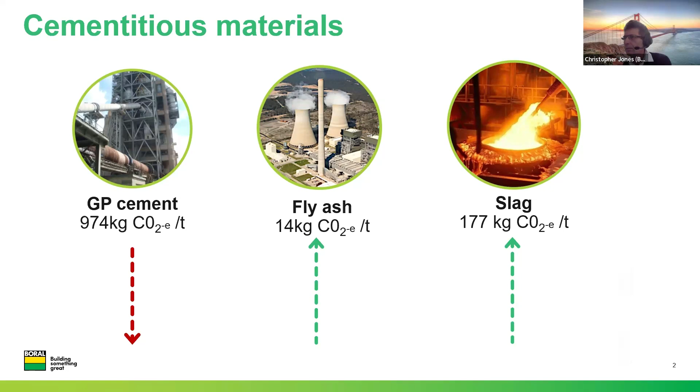Firstly, we need to understand how these values are determined. One of the reasons why slag is higher in embodied carbon than fly ash is that it does require some processing. It has to be granulated and then milled into a powder. But it also gains some embodied carbon through the process of economic allocation.

Economic allocation is a way of determining the embodied carbon of co-products. Co-products are two or more products that are produced from the same process. We don't want to allocate all the emissions to both products, so we allocate the emissions based on the value of each product. Fly ash is considered a waste product with no value to the producer.

Power stations do sell the ash to cement suppliers, but the money they make is so low that it is deemed negligible. So the embodied carbon of fly ash at the power station is zero, and only the emissions from the transport to the plant are attributed to the fly ash.

Slag, however, is different. The steel manufacturers do make some money out of slag, and therefore some of the emissions from the production of the iron are attributed to the slag. This has the result of increasing the reported embodied carbon of the slag and lowering the reported embodied carbon of the steel. So we need to take this into account when comparing fly ash and slag.

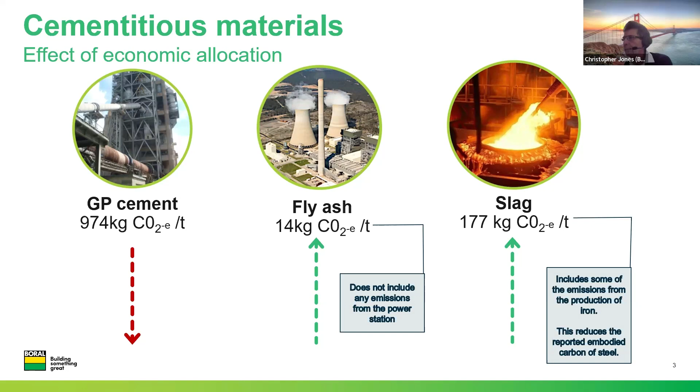The other thing we need to consider is the reduction in GP cement which results from using these products. Let's look at this mix, which contains 300 kilograms of GP cement per cubic meter. We can use fly ash to reduce the cement content, but fly ash is not as potent as GP cement. So for every 1 kilogram of GP we take out, we have to add 2 kilograms of fly ash.

So in this fly ash mix, we reduced the GP content by 50 kilograms and replaced it with 100 kilograms of fly ash. This has resulted in a mix with 29% fly ash, but the GP has only been reduced by 17%. I still see specifications that specify low carbon concrete by a percent of SCM, e.g. 30% SCM. But as you can see, this will not result in a 30% reduction in GP cement when using fly ash.

When using slag, however, you can replace the cement on a one-for-one basis. So a 30% slag mix is likely to reduce the GP content by 30%. And we can replace much more of the cement with slag than we can with fly ash. The example on the right is a 50% slag mix, which has reduced the GP content by 50%. So the point of these last two slides is to show that to significantly reduce the GP content and the embodied carbon, slag is a much better SCM than fly ash.

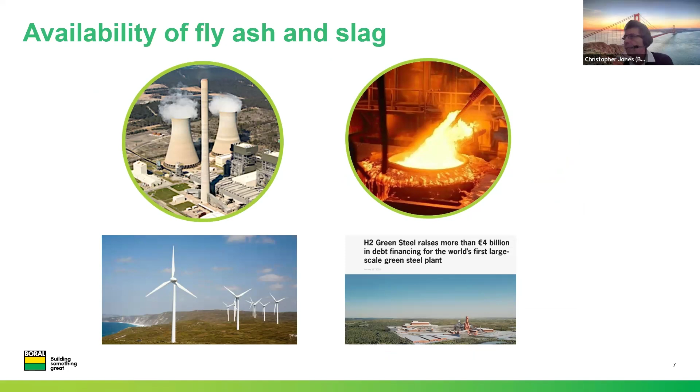So let's look at the availability of these two SCMs and the effect that renewable energy will have on the supply of fly ash and the use of electric arc furnaces will have on the availability of slag. Firstly, let's look at the current availability of slag. I thought this extract from the Institution of Structural Engineers webpage in the UK gave a good insight into this issue. It states that GGBS is an excellent SCM that helps displace clinker demand, which I think we already knew.

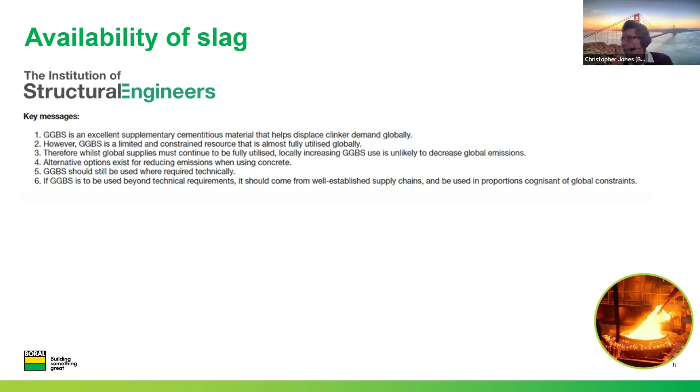But then it goes on to say that it is a limited and constrained resource that is almost fully utilized globally. And the key point is the one that I've highlighted: locally increasing GGBS use is unlikely to decrease global emissions. The production of slag will not increase simply because there is an increase in demand. An increase in demand for a fixed supply will only increase the price of the slag so that the demand and supply are balanced.

And to make it worse, due to economic allocation that I mentioned earlier, a greater amount of emissions from the production of the iron will be attributed to the slag. This will reduce the reported embodied carbon of the steel, but if you're only interested in low carbon concrete, that doesn't help much.

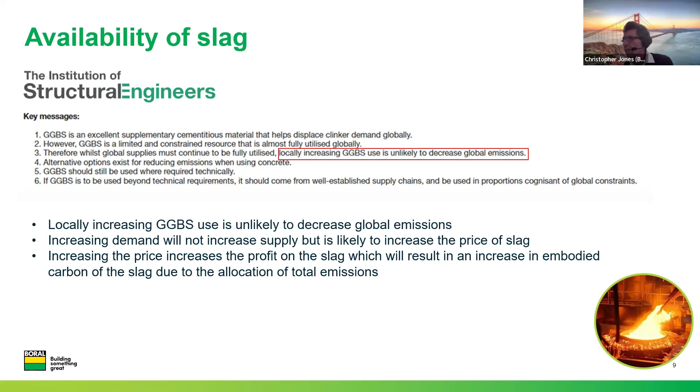What about the future state? Electric arc furnaces will produce less emissions so long as they use renewable power. These types of furnaces will produce slag, but I don't know if they will create as much slag per ton of steel as a blast furnace. Also, their chemistry will be different, and we'll have to see if they have the same cementitious properties.

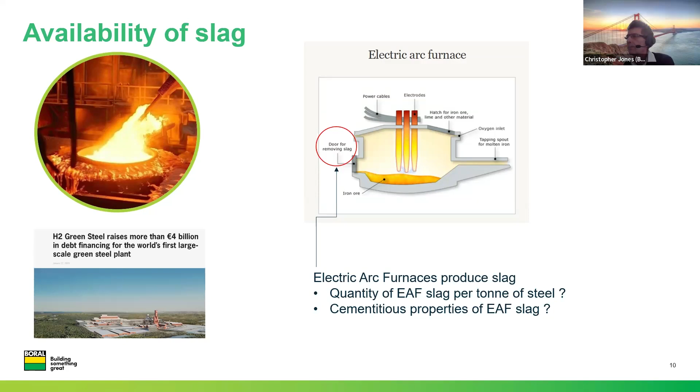Now for fly ash, and the big question is, when will the power stations close? I want to thank Craig Heidrich from the ADAA for this slide. It shows when the power stations are scheduled to close. It includes all power stations, even those that don't produce fly ash for concrete, such as those in Victoria that burn brown coal. But along the top, it gives the fly ash output as a percentage of 2020 production.

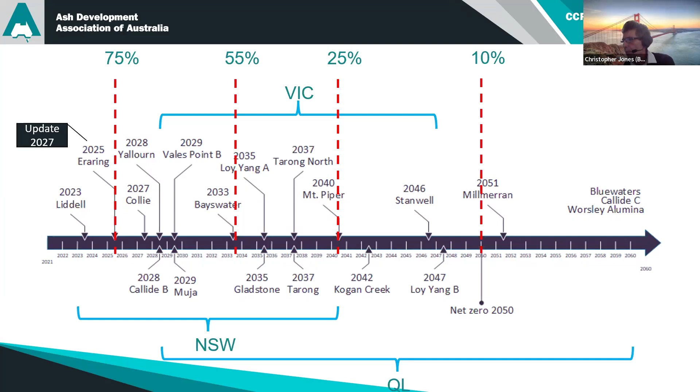As you can see, there's already been some changes to the schedule, with Eraring now operating until 2027, and there may be other changes depending on where we're at with supply of renewables, but there's no doubt the power stations will close, and with it, the supply of ash will be reduced.

In the absence of ash, many people are considering using pond ash. Pond ash is produced by the power stations, but not supplied to the industry, and was simply dumped in ash dams like this one. To understand the challenges of using pond ash, we firstly need to understand why the ash was sent to the ash dam in the first place. In most cases, it's because of one of these.

It might have been good quality ash, but there was no demand at the time. It could have been there was a holiday period or extended wet weather when cement suppliers and concrete users didn't have sufficient silos to store all the good quality ash, and therefore there was no option but to send it to the ash dam. But quite frequently it's due to quality issues.

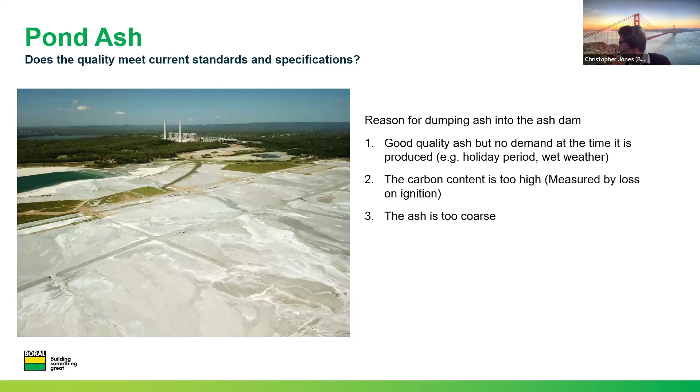The carbon content may be too high. This is measured by loss on ignition, and the ash may be too coarse. Now, when they get sent to the ash dam, they aren't put in separate sides or locations, they're all mixed together. So trying to determine the good ash from the bad ash is pretty well impossible.

So the question is whether pond ash will comply with the Australian standard. In the Australian standard AS 3582.1, there are 3 grades of fly ash. The special grade is used for high performance concrete in a similar way to silica fume, which is not relevant for today's discussion. So that leaves grade 1 and grade 2. The main difference between them is their fineness and their carbon content. The carbon content is measured by their loss on ignition.

Most concrete plants use grade 1 ash, but if for some reason we're unable to produce grade 1 ash from pond ash, we could supply the pond ash as a grade 2 ash, and it would still comply with AS 1379, which is the concrete standard. Grade 2 ash is likely to be less efficient, but it's certainly better than no ash.

The barrier to grade 2 ash is that many specifications call up grade 1 ash. This extract on the bottom right is from a Transport for New South Wales specification, and it states that grade 1 ash must be used. So we may need to have some conversations with specifiers and suggest that the specification should be based on the performance of the concrete, and if we can achieve that with grade 2 ash, then it should comply.

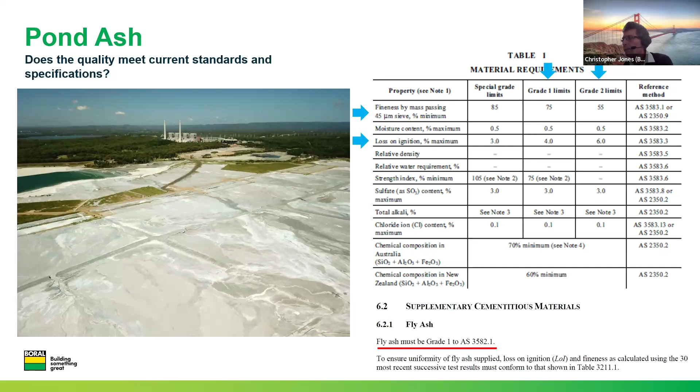But I may be jumping the gun, and maybe we can produce grade 1 ash from pond ash. There's plenty of pond ash being used in America, and there is a company in South Australia who are planning on extracting the pond ash from the Port Augusta power station. I understand they plan to have this ash available sometime next year, so it'll be a case of watch this space.

But regardless of the success or otherwise of using pond ash, we will still need to explore alternate SCMs. In 2022, Standards Australia published a materials specification for manufactured pozzolans. It will still need to be referenced in the Australian Standard for Concrete, AS 1379, but I don't expect any objection to that. It is a performance-based spec, but it does give these examples as to the materials that could be covered. I've highlighted the ones that look most promising. The one in the middle is pond ash, which we've already discussed. So let's look at the other 2.

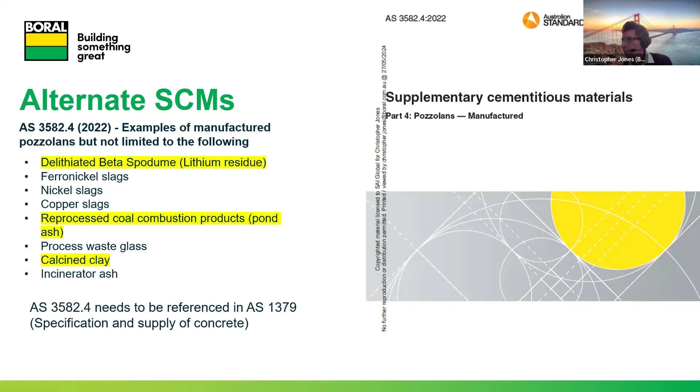Calcined clay is a type of clay called kaolinite, which has been heated to around 800 degrees centigrade. It calcines the clay, hence the name. It is also referred to as metakaolin. Companies in Australia are currently exploring suitable deposits of kaolinite, but so far it hasn't been produced in any significant quantities. The image on the right is a product called LC3, which is a blend of cement containing cement clinker, limestone, gypsum, and calcined clay. And they've been put together in ratios to optimize the performance of the cement.

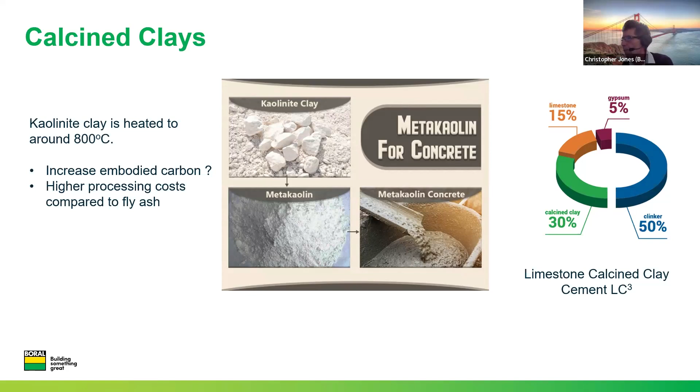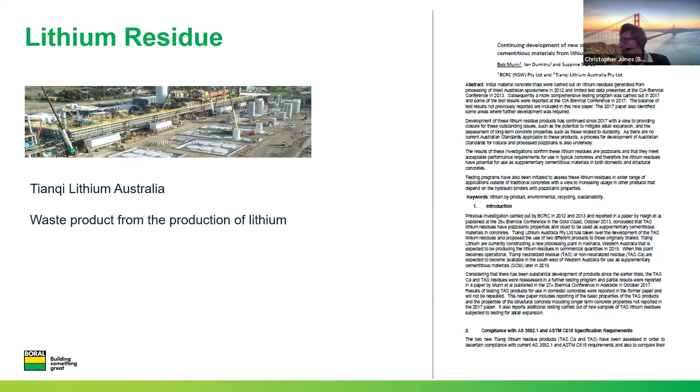The other potential SCM that is showing some promise is lithium residue, which is a byproduct from the extraction of lithium. There's a high demand for lithium for batteries, and Western Australia has significant deposits. Tianqi are currently mining lithium in WA and producing this lithium residue, but so far haven't produced commercially available quantities for use in concrete. That paper on the right is from a durability consultancy called BCRC, which carried out testing on samples of lithium residue that looked encouraging, and the paper is available online for anyone interested in reading it.

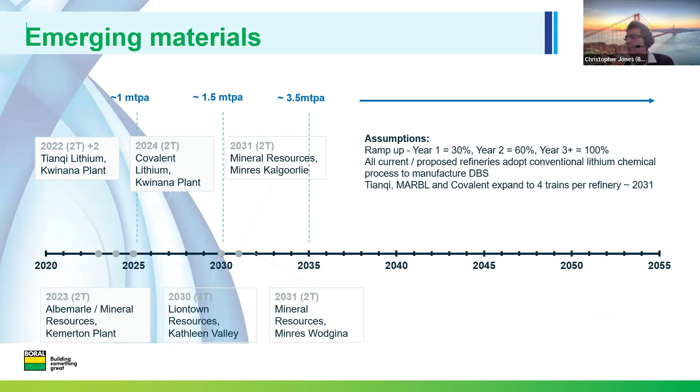That was fantastic. And really talks to the complexity that we have here and the fact that it's not just about the technical performance of some of these supplementary cementitious materials. It's a question of what is the commercial availability of these products? You know, what's the volume? How do we actually get that logistics to work? That was really fantastic. Thank you.

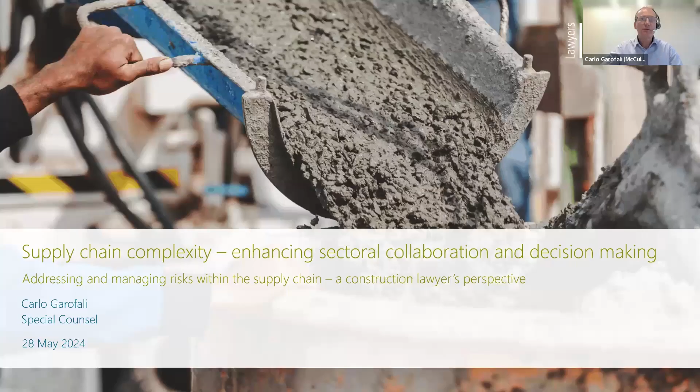Hi, everybody, and thank you very much for this opportunity, Claire. I'll just try and share my slides. Oops. If someone can confirm that you can see my PowerPoint slide. Yep, they're up and running.

So I was asked to touch on what risks in the supply chain need to be identified, how does the industry perceive the risk, how are we managing the risks, and some key takeaways. So I think our challenge is, there's obviously a widespread desire or an explicit appetite for innovation and recognising that we should be doing more to achieve our ESG objectives. But how do we balance that with the implicit aversion for risk?

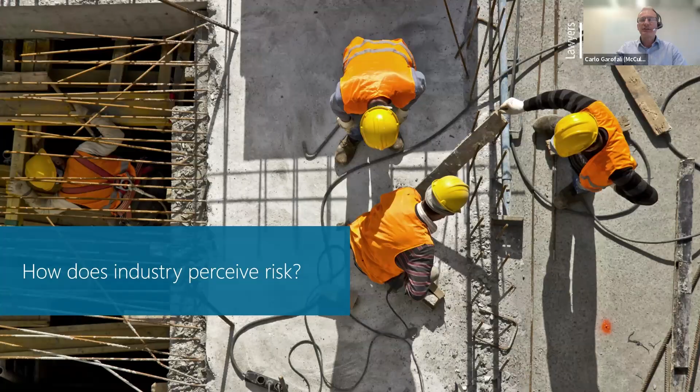So how does industry perceive risk? And I think the short answer is not very well in terms of today's presentation's objectives, namely because the industry is inherently risk averse. Everyone's trying to pass risk wherever possible, and the poor suckers down the end of the line who are accepting that risk do so sometimes begrudgingly, or sometimes knowing full well that that's the only way that they will win a project, and they're effectively gambling with winning the job, hoping that they'll make money and things don't go pear-shaped down the track. When they're taking on inappropriate risk, that's a recipe for asking for trouble.

The current reality, I think, is contrary to the philosophical premise, namely that risk ought to be borne by the party best able to bear that risk. That sounds great in theory, and I think that makes a lot of sense at a high level to most stakeholders, but it's rare, and as I just mentioned, is, in my view, the source of most disputation between various parties, whether it's principals and contractors or downstream to subcontractors and consultants.

So what's the solution? Having talk fests and webinars and education opportunities such as this is a big part of it. I think overcoming fear of the unknown or ignorance regarding particularly unproven technology, but also helping people make enlightened and informed decisions about how best to achieve our guidelines and not just pay lip service to it and say, okay, well, this is what we want, contractor go off and screw your subbies to make sure that they deliver it, without making sure that something is actually deliverable and pragmatic, and you're not paying a fortune for it, and that whatever we have on our innovation wish list is actually achievable.

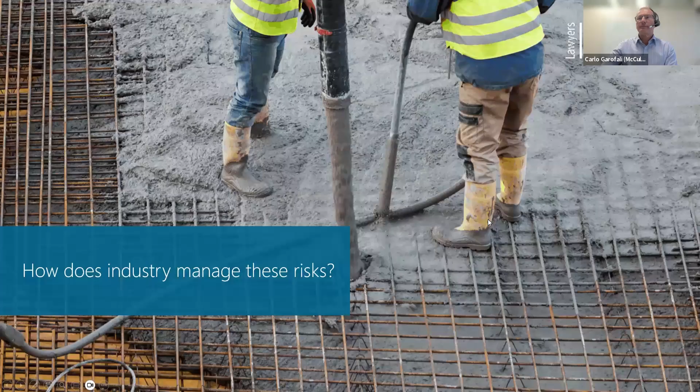So, how are we going to manage these risks? The answers kind of overlap a little bit with what I was touching on before. The industry is conditioned to pass on as much risk as possible, which I don't think is effective. So how do we manage that better? And maybe at a high level, I don't have all the answers, but when we're trying to formulate some of them, just keep these issues in mind, perhaps.

So if we are, say, presented with a PPR, Principal's Project Requirement, by someone like Stockland, who's calling for a performance goal wish list, make sure that the contract terms and specifications are accurately mirrored all the way through the downstream parties.

And what I'm getting at is our firm is involved with a Supreme Court matter at the moment, and I'll just call it the Chinese Whispers case study, in that specifications were modified downstream by some well-meaning person, but the end result was that the subcontractor at the end who supplied this technology did so in accordance with what he was asked to do, but it didn't meet the performance criteria of the end user or the client at the top of the food chain, and it's resulted in a 4-year Supreme Court matter that's still yet to be resolved. So there are horror stories out there if we don't get our jobs done right.